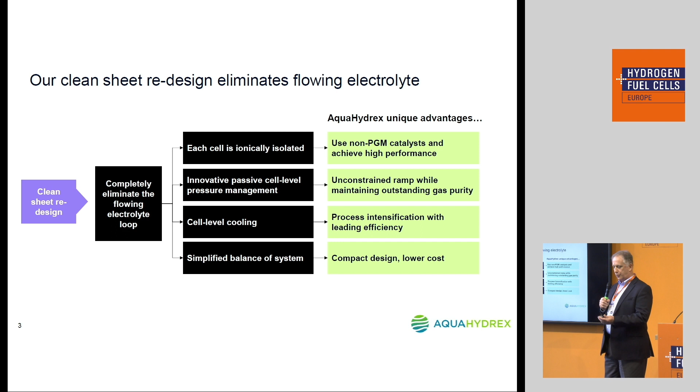You think about producing electricity—what's the biggest cost component in hydrogen production for anybody's system? It's power, so efficiency really matters. So we can get really high efficiency, but we can also use the lowest cost power, which is that intermittent renewable electricity.

The system's designed for high volume manufacturing. The componentry we're choosing for the cell design means we can automate the manufacturing of the system, which will really drive down capital cost as we ramp up production.

And we think importantly, we're generating both the hydrogen and the oxygen at 30 bar pressure. So for many of the industrial applications that are out there today, that means you don't need product compression for the hydrogen product, which is quite expensive.

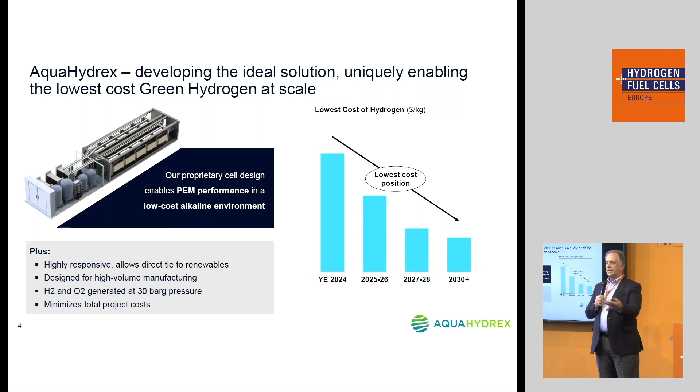So then just in summary, where we're at, again, we're preparing for product launch. We're really proud of the technology that's been developed. We've demonstrated it at various scales, at the lab scale, at the process demonstration unit, and we're focused now on market entry. We're looking to enter the market where we're optimized for the lowest cost of hydrogen. Again, we're not looking for low capex or best efficiency or low O&M alone—we're looking for low all of it. We're trying to find the intersection that derives the lowest cost of hydrogen for the market.

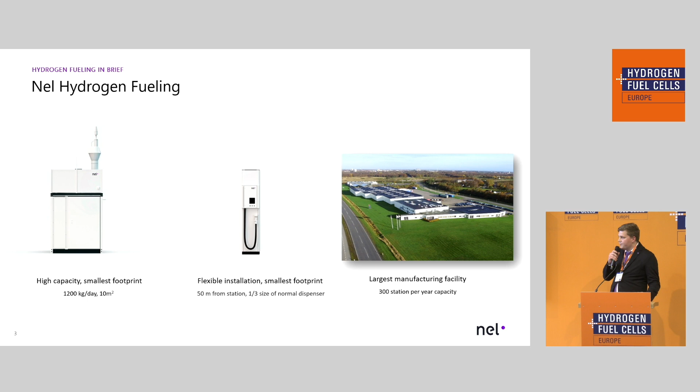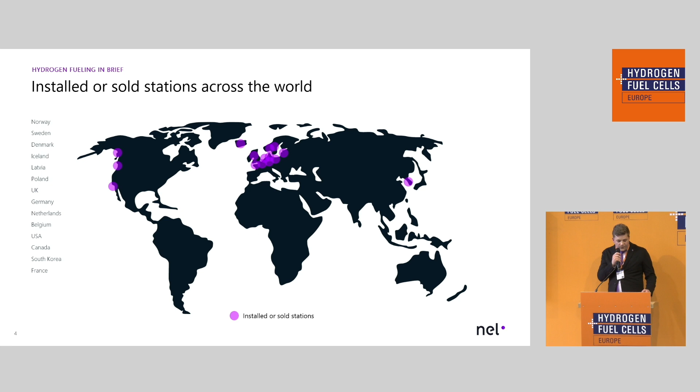In total, we have sold and installed more than 100 stations in the past years, and our fueling division is almost 20 years old, while our electrolyzer division is soon 100 years old. So we are quite experienced in the hydrogen world, and we only play with hydrogen. That's also why my last slide says thanks for the ride, dinosaurs.

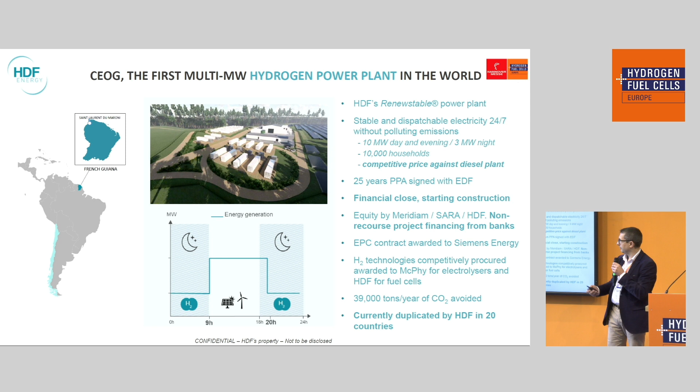As you see here, the 16 megawatt electrolyzer, which we are constructing at the moment, will be completely installed in French Guiana, in a tropical environment. It will be fed completely by the PV farm, which will be a first of its kind. It is based on our current technology, pressurized high current density alkaline electrolyzer.

As said, it's under construction. The commissioning of the electrolyzer and the whole plant is set to be in 2024.

You see here a bit more details about the installation, about the modules, 4 megawatt modules of the electrolyzers. We have 4 modules of 4 megawatt, fully outside. The stacks, as you see there, are inside containers. The separators between the electrolyte and the gaseous phase is fully outdoor with some rain shelters, as well as for the final purification of the whole unit.

Of course, one of the constraints was to set the complete equipment to fit with the local environment, tropical conditions, which is also a challenge, of course.

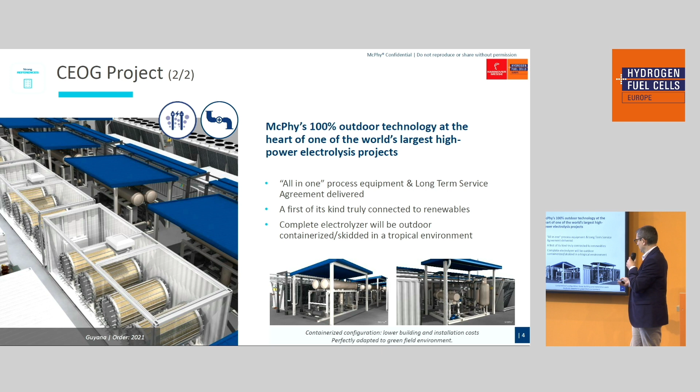What is important to say, a part of the only supply of the electrolyzer installation, is that this electrolyzer is the stepping stone of the whole industrial scaling up of not only McPhy, but also an important part of the complete ecosystem.

On top of that, we are part of the IPCEI process, pre-notified, and by 2024, upon final confirmation, we will add to the 300 megawatt a 1 gigawatt capacity with a gigafactory which will be installed in France.

Last but not least, to notice as well, because this is usually a major concern of the people implementing such big projects, together with the pure capex and the delivery of the electrolyzer, we have an LTSA, a long-term service agreement, which is part of the package to ensure that the maintenance of the electrolyzer, even in remote places such as French Guiana, is ensured, and that the performances of the electrolyzer can be monitored and kept during the lifetime of the project itself.

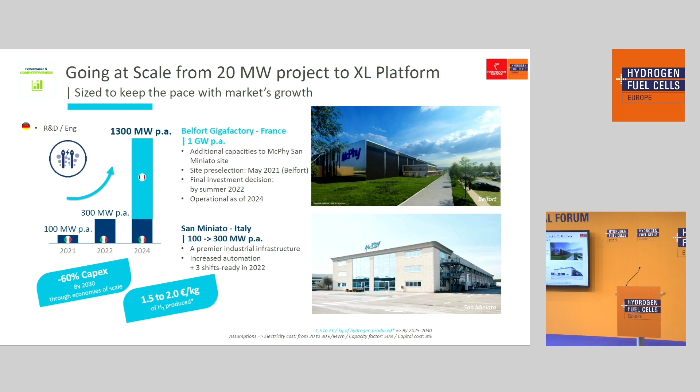So, could you, I'm running out of hands here. That's the microphone for our next person up on stage. And I'd like to welcome on stage Saro Capozzoli, who's co-founder and director of H2 Energy. Is he in the room? Yes, he is. There you are. Okay, let me pass on the microphone. Welcome.

Hi, good afternoon. It's a pleasure to be here, and I will do a very short presentation because I think you have seen so many presentations today that I think you are more expert than me about hydrogen. I would like to introduce briefly my company.

I think we have many things to say, but in 3 minutes, what I can say is that we are electrolyzer producers. We have in our pipeline all 3 technologies: the alkaline, the PEM, and also the AEM technology.

I can tell you our company is relatively new, but we have a team of experts and technicians that have more than 25 years experience in the sector.

And what we did with my partners was to bring together expertise and people in order to have the best of Italian minds in Italy, because some of them were outside Italy. We asked them to come back, and we have done our best to start up these companies, and we are already able to produce not only on paper but in reality.

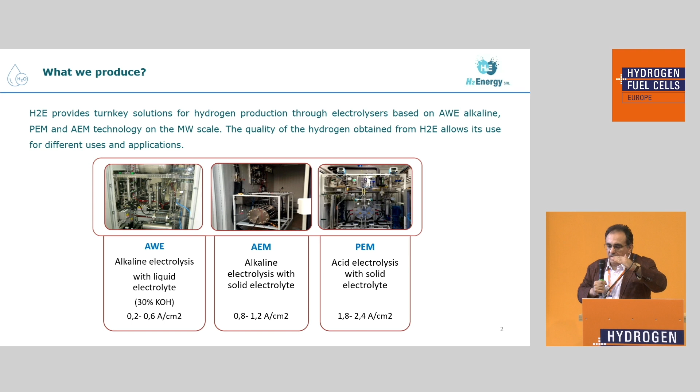This is a brief introduction to our AEM implemented in this period. We can see that this will be a game changer, because we simplify a lot the layout and the BOP of the plant.

We have 1 pump instead of 3. We simplify the system, and this will be a game changer also for capex, because we can beat all the other technologies with at least 40% cheaper cost.

One important thing is that this will not replace PEM, because PEM will always be in our pipeline, in our project. In fact, this year we are going to produce between 5 to 6 megawatt. This is one of them. And next year we have a pipeline between 30 to 40 megawatt.

In 2024, we will start our automated factory to assemble stacks. We are going above 100 megawatt. So we have the target to start in Italy the first gigawatt factory, starting from here.

Applications. We speak about application because we are discussing several projects. This is one of them, for example, where there are already hydrogen trains in place, already purchased. Our philosophy is to produce hydrogen where it is needed.

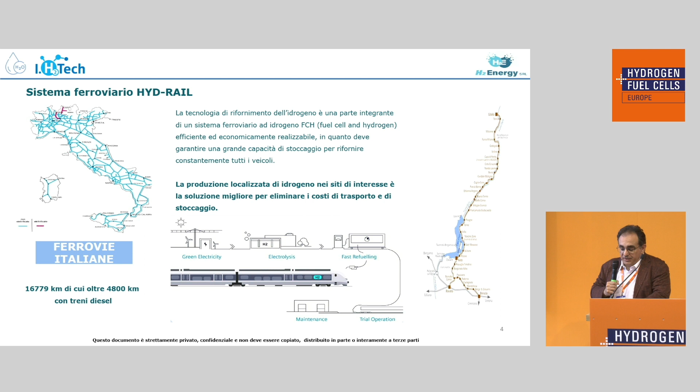In this moment we are discussing with steel factories, secondary steel makers, where we will introduce our machinery equipment in the production of steel, where hydrogen will be used as a reducing element for the steel, and oxygen will also be used as a fluidification fluid in the steel, about 40 normal cubic meters per ton.

But one application where this plant will be applied is steam production for food processing. We have plenty of food processing factories in Europe, in Italy, where a large quantity of steam is generated, currently produced by methane.

Now we are going. This plant will go to industrial units where hydrogen will be mixed with methane in order to reduce the cost of steam production. In a short time, we are going to replace methane with hydrogen. So we are looking for local application, like in steel, glass production, ceramic production.

So we need to start from where we need to act at once to reduce the CO2 impact. Then, step by step, when the technology is mature, we are going to produce the big factories to concentrate, but we need many investments also in storage and in pipeline, in transportation. Until that moment, it will be very difficult to speak realistically about this kind of diffusion.

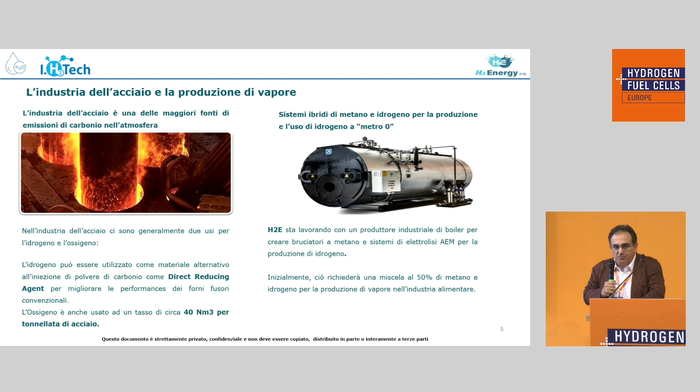We are located near Milano, near Cremona, and we hope we are the first hub for hydrogen in Italy, and we are very happy to work together with our competitors to get the market together. Thank you very much.

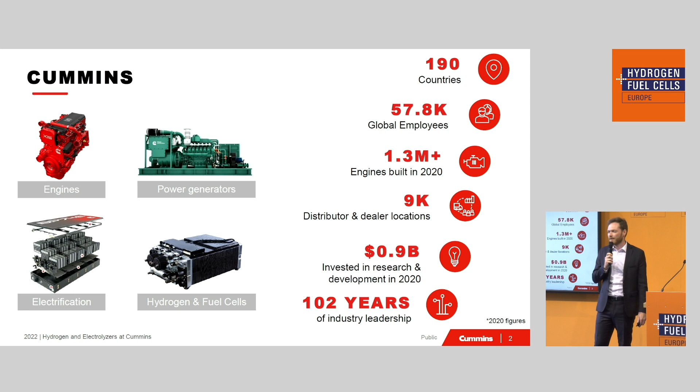All right, thank you very much. So, Cummins is an American company, Fortune 500, present in 190 countries, and very famous all over the world for manufacturing diesel engines and power gensets for more than 100 years.

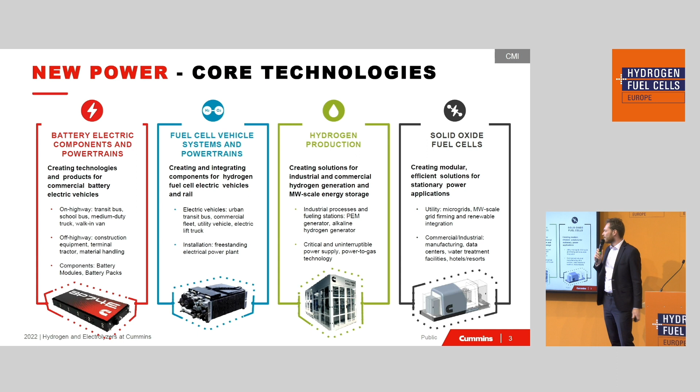So why am I here today? Because Cummins, in 2018, began its path towards equipment for the environmental transition, creating a new business unit called New Power. New Power commercializes products like batteries, powertrains for electric vehicles, fuel cells, and electrolyzers.

With the acquisition of Hydrogenics in 2019, Cummins gained more than 50 years experience in the electrolysis business. And my main message here is that we are one of the few companies that has a product dedicated for each scale of project today.

We have small scale applications with our alkaline containerized turnkey solution for projects below 1 megawatt. Then for projects below 10 megawatt, we have PEM container, also turnkey, at 30 bar. And for projects bigger than around 10 megawatt, we can push with our indoor solution with 5 megawatt building blocks that are installed today. So all the products I've just mentioned are today installed, commissioned, and operated for more than 1 year.

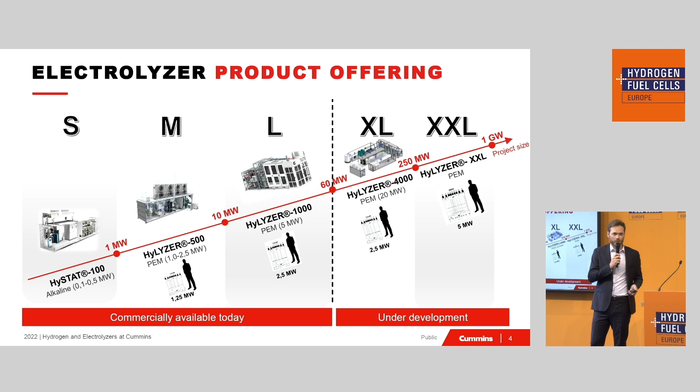For projects bigger than 60 megawatt, we are developing and finalizing the design of the big brother of the HyLYZER 1000: the HyLYZER 4000, a 20 to 25 megawatt building block. These two products, indoor solutions, allow customers to optimize their full application, optimizing the balance of plant for the full application. We're working, for example, with KBR Technologies for 3 years to integrate our electrolyzers into their Haber-Bosch process to produce green ammonia, with an integrated solution for green ammonia production.

We have products for any scale of project, and products for all geographies. How are we serving all those geographies? We're scaling up our manufacturing capacity today in Belgium and in Canada, our historical sites, but also adding new capacity in China to reach a capacity of 2 gigawatts by 2023.

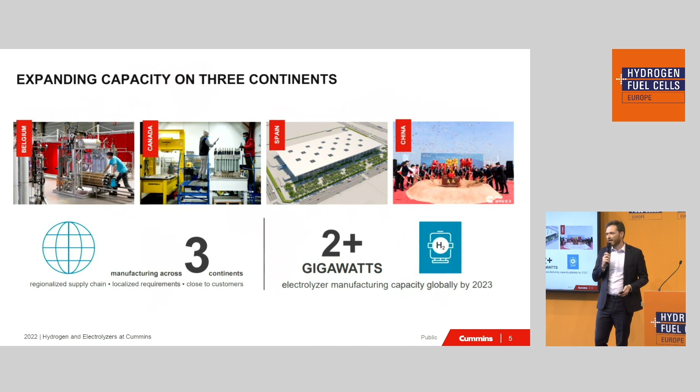Here I want to show you why we choose PEM, beyond just efficiency and flexibility, for large-scale applications. There are some hidden advantages you can see here. First, our PEM cell stack for 1.25 megawatt and 2.5 megawatt - you see that we don't increase the footprint while doubling the capacity.

This has a first advantage: savings on land and building. Buildings are smaller, but there's a hidden advantage. The capacity of that stack, with our special Cummins design, allows us to enclose all the ATEX areas in boxes, meaning all the building around our electrolyzer is not ATEX. It's safer because operators do not work in an ATEX environment, and also this enclosure allows us to stop one unit for maintenance while continuing to operate all the other units. This means the availability of the plant is higher.

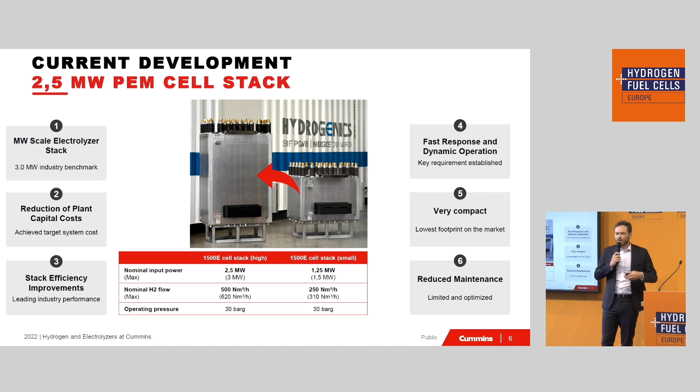Combined with the last advantage of PEM technology, the capacity to overdrive the cell stack - running at 125% of nominal capacity - this increases the availability of the plant, and also allows us to reduce the sizing of the plant, optimize the sizing, and so reduce the capex.

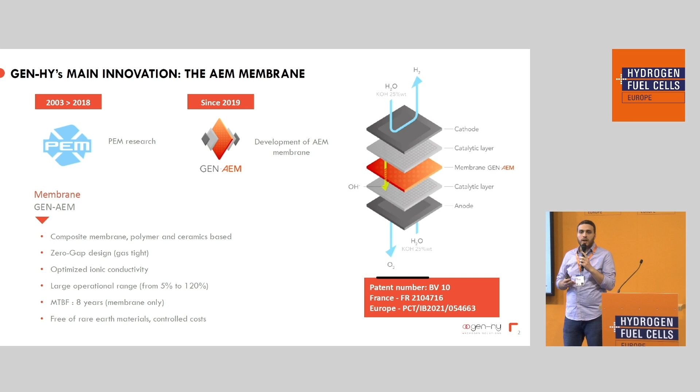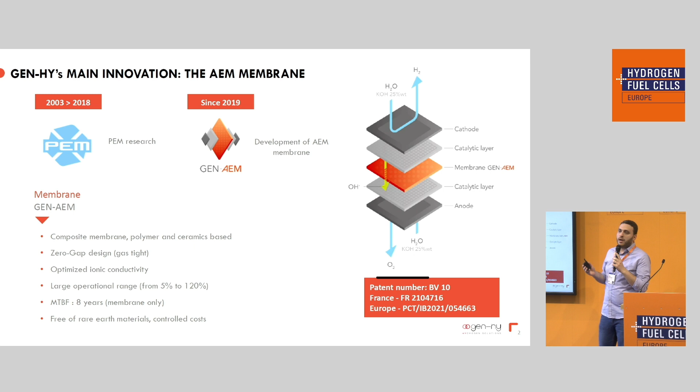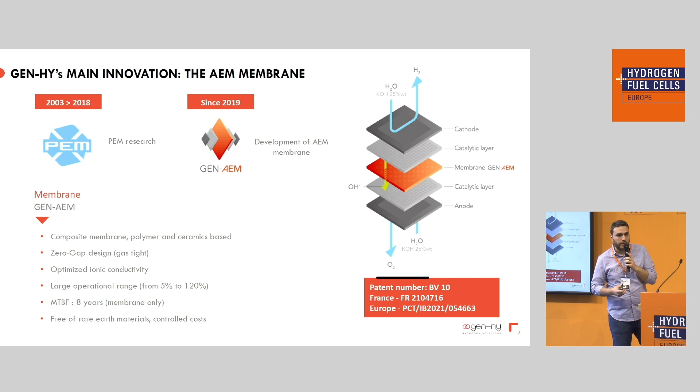Our membrane is proven to be performant. It's a ceramic-based membrane proven to be performant in alkaline medium, so our stacks function in a basic medium. Our membrane is a composite membrane with optimized ionic conductivity and a high mean time before failure. The lifetime of our membrane is proven to be around 7 years of functioning, or 50,000 hours of operation. Since we operate in alkaline medium, we don't use any rare metals for our catalytic deposit layers or the electrodes.

Our technology is proven to be highly efficient - we have a proven efficiency of 85% on the stack in high heating value. This efficiency represents the nominal operating point of our technology. Each stack at nominal operating conditions can produce 25 kilograms of hydrogen per day at 30 bars of pressure, with a 50 kilowatt capacity and a lifetime of 8 years.

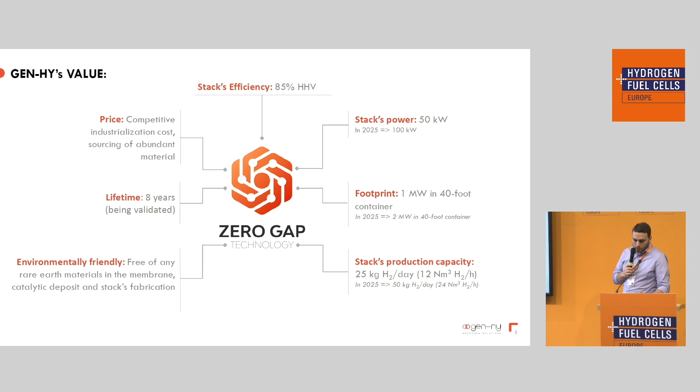As you can see here, our efficiency was proven by a third-party laboratory, the École des Mines in Paris, France. You can see the efficiency curve of our proven efficiency, around 85% at 0.7 ampere per centimeter square, which represents our nominal operating point in order to have the 7 to 8 year life cycle. Of course, we can operate at different ranges of current density.

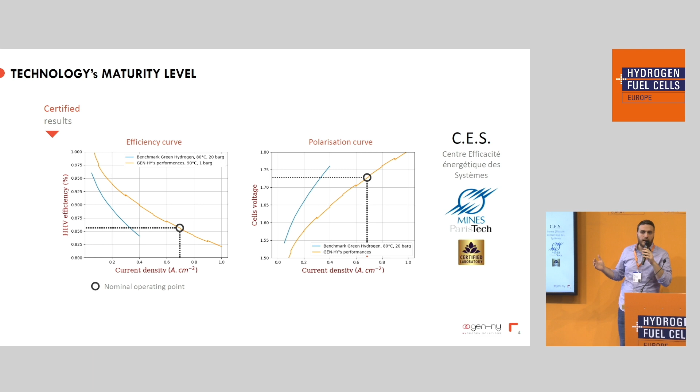Since we have our AEM membrane, we can have a compact stack of 500 centimeters square of surface area. So we are not obliged to have massive stacks in order to produce high quantities of hydrogen. Just next to the efficiency curve, you can see the polarization curve, which represents the operating point that we have chosen.

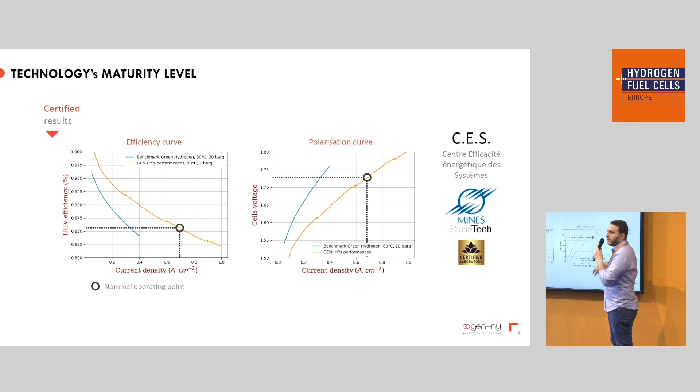Due to our AEM membrane and zero gap stack architecture, we can have a modular approach for our electrolyzer system. As mentioned previously, we have a compact stack of 50 kilowatt capacity. This stack can be multiplied based on demand.

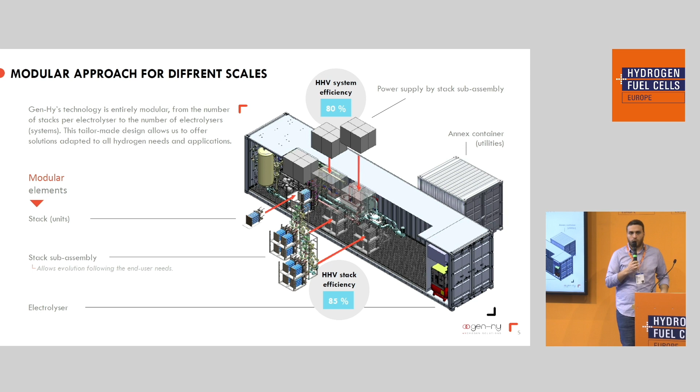We chose the modular approach of clusters, with 200 kilowatts per module. Each module can have 4 stacks of 50 kilowatt nominal capacity and can be multiplied based on demand. So mainly we have two kinds of products today: a 20 foot electrolyzer unit with a capacity between 100 kilowatts, 2 stacks, up to 400 kilowatts, 8 stacks, and another 40 foot electrolyzer unit with a capacity that goes from 600 kilowatts, 12 stacks, to 1 megawatt, or 20 stacks.

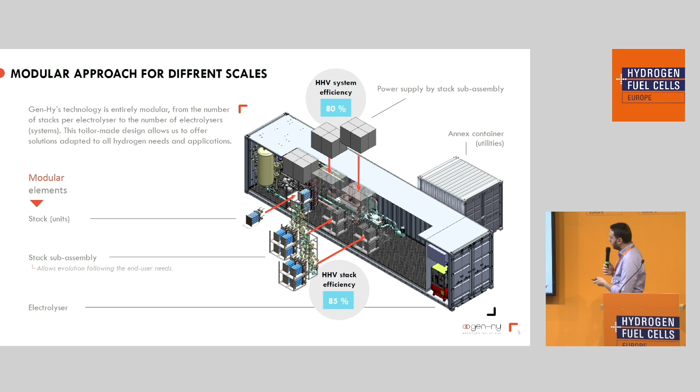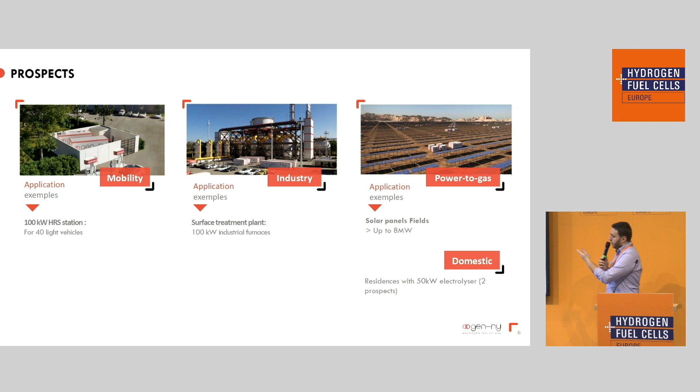Today we've identified several kinds of applications and markets for our technology. There's a lot of demand for mobility applications, refueling stations for several tens of kilograms of hydrogen per day at 350 and 700 bars of pressure, as well as storage and power-to-gas applications, and other industrial applications.